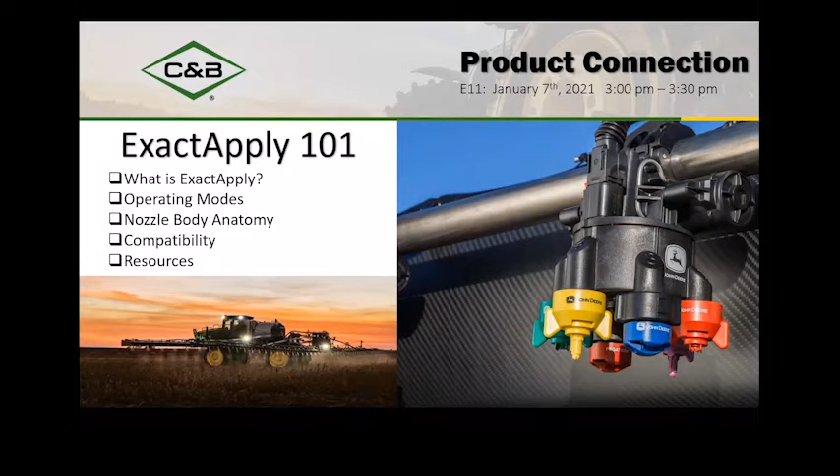Now, with all that being said, not everybody has to be an expert on it. Part of what I want you to leave with also is if you have questions, where can you go for resources or who can you call and those sorts of things. So appreciate you hopping on today. So we'll go ahead and just dive right in.

So first off, when we talk about ExactApply, there's really four key features that we talk about. The main thing being the operation modes would be the best way to describe it. So there's auto select AB, which is basically conventional spraying, letting the sprayer decide which nozzle is the best to use. There's 6 nozzles on an ExactApply nozzle body, and we'll look at that here in a little bit. The sprayer, based on the pressure thresholds and the nozzle types you're using and the speed that you're running, can automatically switch from one nozzle to another or run both at the same time.

Now, this is an industry exclusive thing. Nobody else in the industry is doing this today to the level that John Deere is. Now, Pentair and Hypro, they've got a duo select system, which does something similar, but does not have all the features that Deere is running specifically. And they've been working together on both systems.

But Case, Agco, they're all running essentially a Raven built system today. So for the past several years, if you look at like a Case sprayer that's got Aim Command or Aim Command Flex, that is more than likely built by Raven. Should be the same as their Hawkeye system. So anyway, that's auto select AB.

The other main feature we talk about, and the rest of these are going to be a little more consistent with what other competitors offer in the market, is turn compensation, allowing the nozzles to keep consistent flow across the entire boom when we go through turns. So obviously we've got it on planters with ExactEmerge or MaxEmerge. Sprayers doing the same thing.

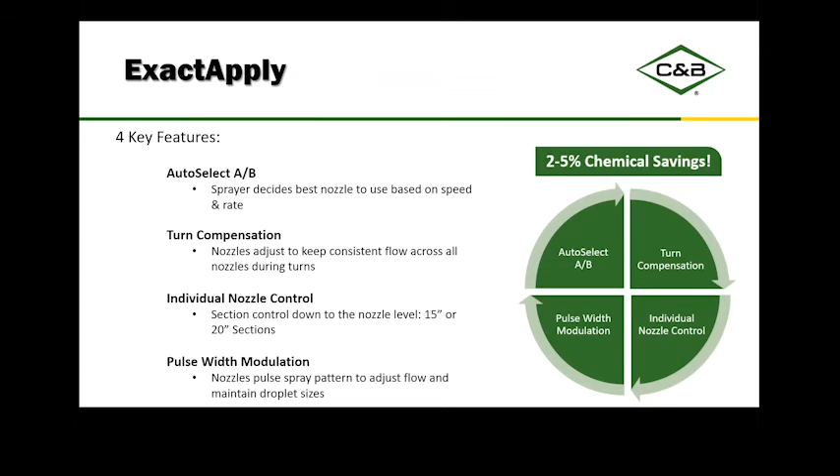So a couple quick animations looking at each one of these examples before we get into the nozzle body anatomy. First off, the auto select AB. Like I mentioned, auto select AB allows the sprayer to select one nozzle versus another. So we'll see it here.

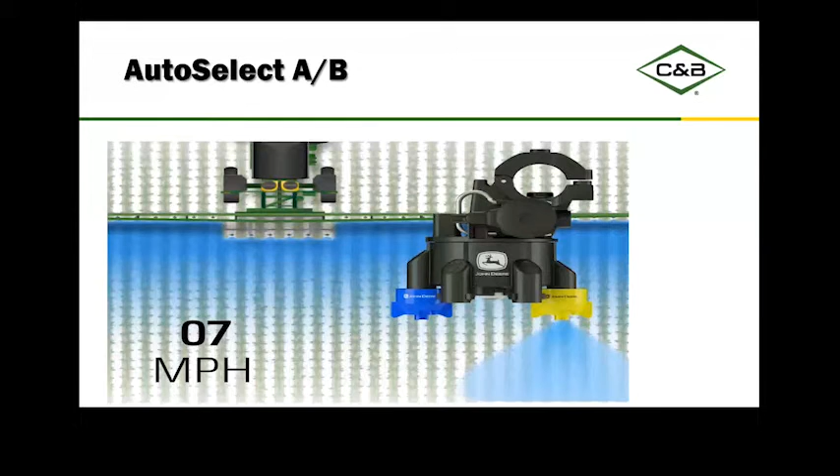We're running the yellow nozzle. We get to 8 miles per hour. The sprayer detected that we're moving faster. Our pressure may have gotten up to 60 psi. Switches to the second one. And here's the industry exclusive bit: we get to a higher flow rate and we can kick both nozzles on at the exact same time.

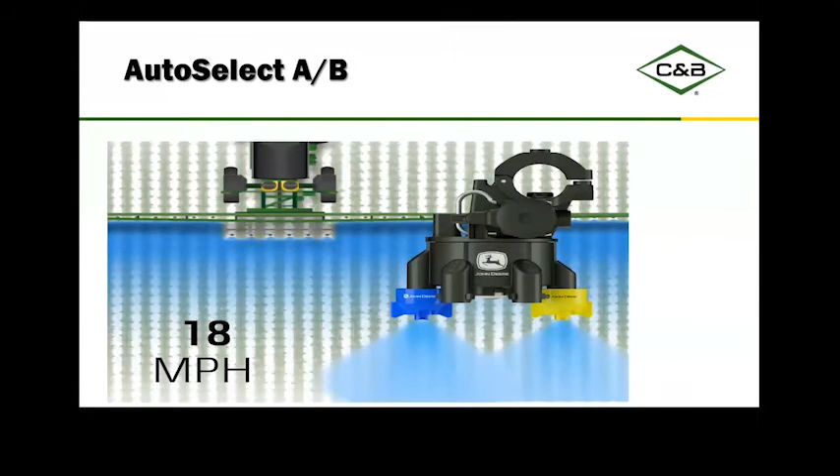Think about your guys applying pre-emerge fertilizers or restricted-use chemicals. For instance, if we've got a label that doesn't let us use a tip we can pulse with, like most air-inducted tips, we're not allowed to pulse them. Running an auto select system allows us to keep our pressure down but still spray conventionally, which is one of the nice things about ExactApply—we can pulse, or shut the pulsing off and run conventional spraying, using it either way.

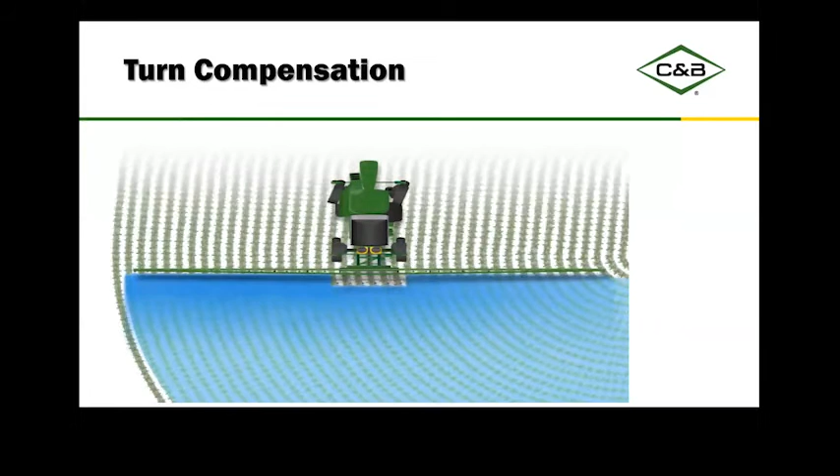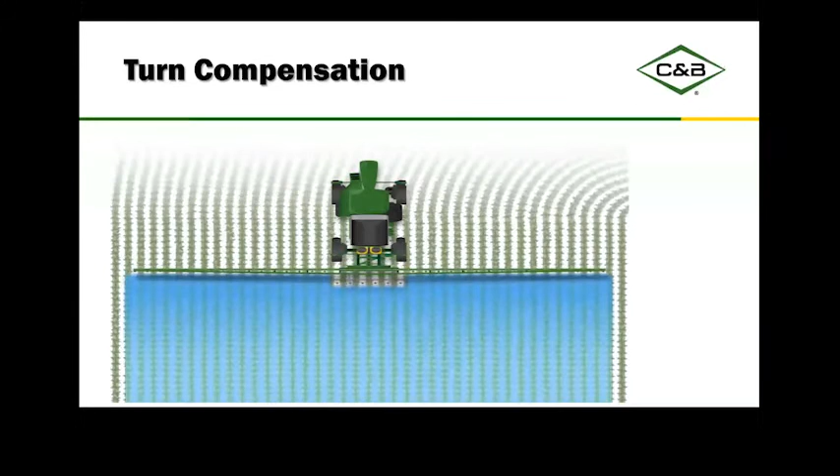The next feature we talked about was turn compensation. Nothing different here, just allowing you to see the animation. As we go through the turn, the inside flow rate decreases, the outside will increase. And couple that—if you take a tighter turn where the nozzle bodies overlap where they've just applied—we can actually shut those nozzles off automatically using section control, which is what we look at here in the next example.

The individual nozzle control—think about a 120-foot boom with 15-inch spacing, that has 96 nozzle bodies on it, so 96 individual sections, which can lead to that 2 to 5% chemical savings. If I do 2 to 3 passes per year, and run a chemical program that's $40,000 to $50,000 a year, that can add up very, very quickly. So individual nozzle control is something that's pretty outstanding, and that benefit just increases with more point rows, more waterways, and things like that.

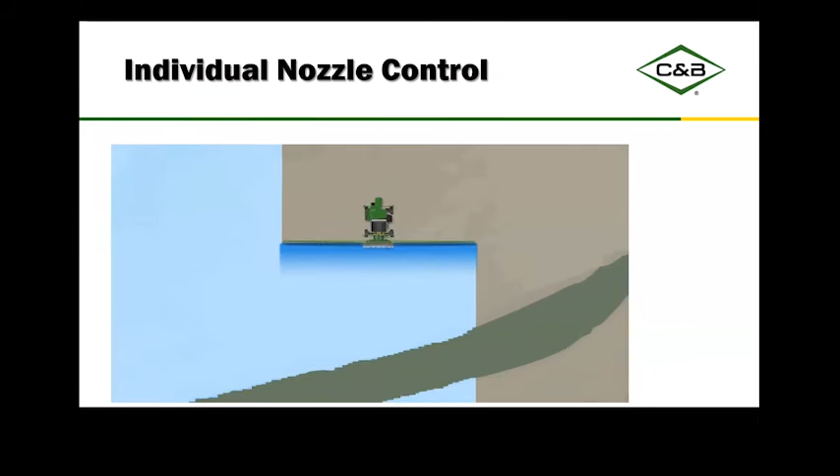Okay, when we talk about the PWM side, this one gets a little more complicated to describe, just because it is fairly new when we talk about spraying out of nozzle bodies. It uses similar technology we've seen in other PWM-type applications, but what we do is have a couple different operating modes, and that tells the nozzle bodies how to react. The modes of operation are combined mode or separated mode.

When we use both of them together, they are opposed from each other, so they don't apply at the same time. That allows us to apply up to 30 times per second, which is the fastest in the industry by about 10 times a second. So a really good advantage we have there.

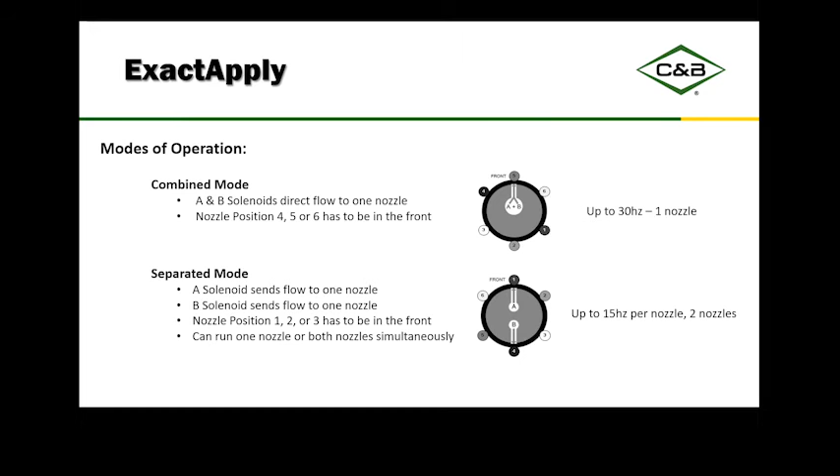One of the questions I've gotten is about pulsing in auto select. If you remember auto select, it's being able to have the sprayer automatically select which nozzle to use, and that's correct — it's only spraying conventionally today that auto select will work. Last I heard, Deere is working on having an auto select option while pulsing, but today our software does not allow it. If they do come with it, it'll be a software update, not a complete machine rework.

Okay, so combined mode. A little more detail here as far as some of the features we can operate. I've talked about a few of these, but again, the A and the B pulse are going to be coming out of one nozzle, which allows us to pulse at 30 hertz. We get turn compensation, individual nozzle control, or section control. They also have a feature called boost.

So boost allows me to put a higher flow rate out selected nozzle bodies if I want. Think about applying a higher rate directly behind the wheels to help penetrate through any dust that might be getting kicked up, or possibly on the outside couple nozzle bodies to put a higher rate in fence lines where, at least at home, we've got ragweed problems. So I might want to make sure I get a little higher dose out there to maximize penetration and coverage.

We also can run pulsing off, meaning it'll be a conventional sprayer at that point. When we spray conventionally, a sprayer that comes from the factory with ExactApply does not have any section valves, so the only way we can shut sections off is through the nozzle body. So if I spray conventionally, the nozzle body acts as my section control valve. I would still have nozzle by nozzle shutoff even when spraying conventionally, which, when we look at our most competitive machines, is not the case without totally switching modes and reconfiguring the system and the monitor.

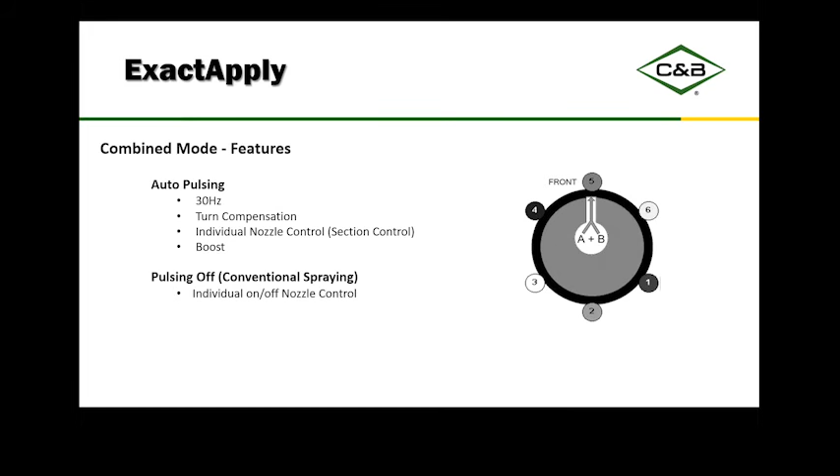Okay, separated mode, just a few more things here. Individual nozzle pulsing, so only one nozzle is pulsing at a time. We can have them, in this case, running A or B, so 15 hertz would be the maximum we could run those at. We do get turn compensation, individual nozzle control or section control. Boost is an option here as well.

And then manual nozzle switching, that's basically the push button switching from the A nozzle to the B nozzle from the armrest, which we'll talk about again in future classes, where the buttons are and so forth. We can get A plus B pulsing, which basically is using the A nozzle and the B nozzle at the same time. So both solenoids are pulsing, but out of separate nozzles, which gives us the 30 hertz pulse total option. So we get that turn compensation, boost, and individual nozzle control, just like the other modes.

Then also when we are in separated mode, we can run in auto select, which again would be conventional spraying at this point, no ExactApply, or no pulsing I should say. That does give us individual nozzle on/off, automatic nozzle switching, and we can, when we're in auto select, manually select which nozzle we want to use as well. And there is a little bit of math and finesse to selecting nozzles with the auto select. We'll get into that in some future classes as it gets a little more advanced, just depending on what a customer might be applying with.

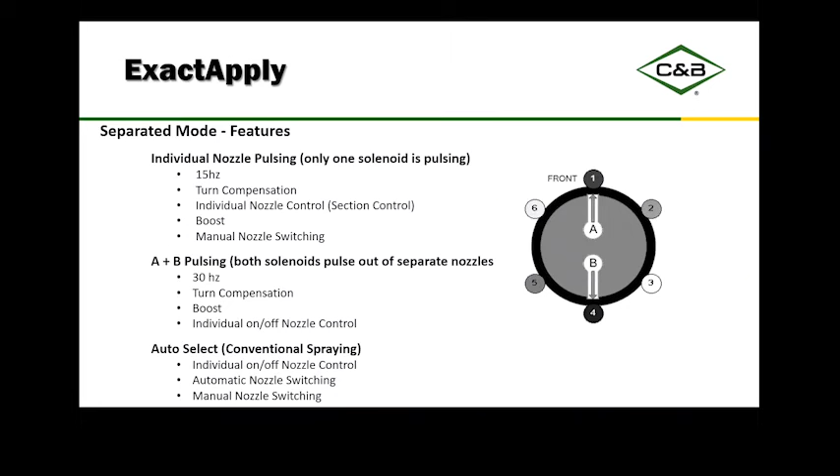All right, let's back up and take a look at some nozzle body anatomy. There are a couple things here to make a note of. First off, the way this nozzle is positioned is how it would be if the sprayer was traveling forward. So nozzle position 4 is in the back, and 1 would be in the front position right now.

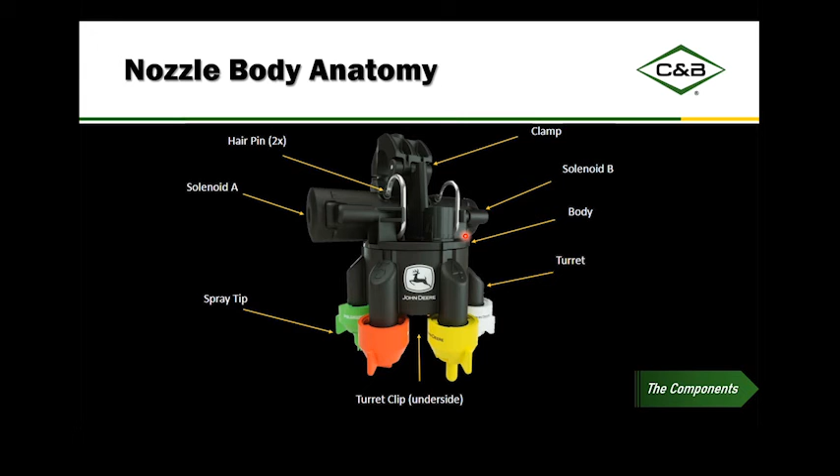Our A solenoid will always be on the left-hand side, and the B solenoid will always be on the right-hand side. If the nozzle body is off of the machine and you're bench programming it, or a customer dug them in the dirt and you need to do some repairs, the way to tell is the electrical connector comes in and is always on the back side. So with the back side pointed towards you, A will be on the left and B on the right. There are hair clips here, and I'll actually break a nozzle body apart in a minute to show you the different components. If you've got questions, feel free to unmute and ask, or type them in the chat.

So when we turn the nozzle upside down here, you'll see there are positions for 6 individual nozzles. You don't have to have all 6 on when you're out running. The system just essentially has to have 1 on in order to spray, as long as you're only applying out of that 1 nozzle port.

We have positions for 6, but a lot of our customers don't need 6 at the same time. So if I only have 2, 3, maybe 4 nozzles that I'm using, we have the option of putting caps on here. They run for about $1 a piece, so we can cap the additional ones as well. Factory machines in 2021 are supposed to be coming with caps on already. I have not verified that, so if anybody knows that for a fact, let me know. But last I heard, they were supposed to be shipping with the caps on.

The bottom side has an integrated LED light as well, which allows for great nighttime spray conditions. Even during the day, that light can be on, and it shows you, as you're sitting in the cab, a bit of the spray pattern out of each individual nozzle. It makes it easier to see if there's any blockage issues, and when you're pulsing them, having something change while you're sitting in the sprayer helps you verify that something's working correctly, which is what's really nice about having that LED light underneath.

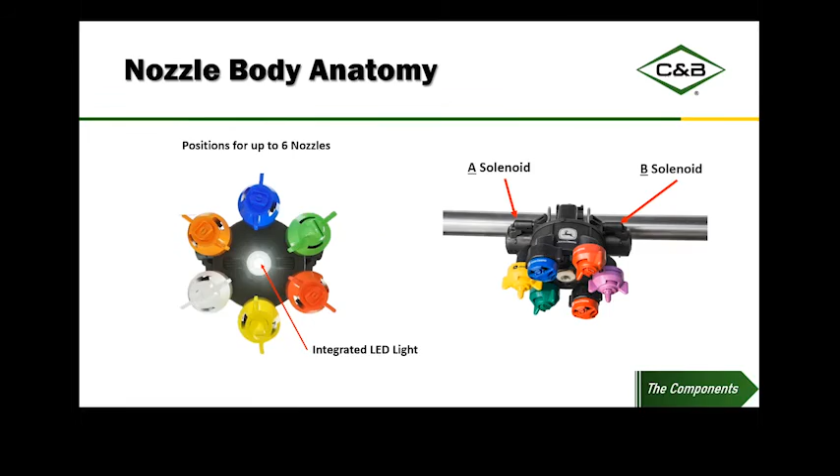Okay, I'm going to stop presenting here and show a camera. If you guys can't see those nozzle bodies, let me know. But I want to give you a real quick look here at breaking down a nozzle body.

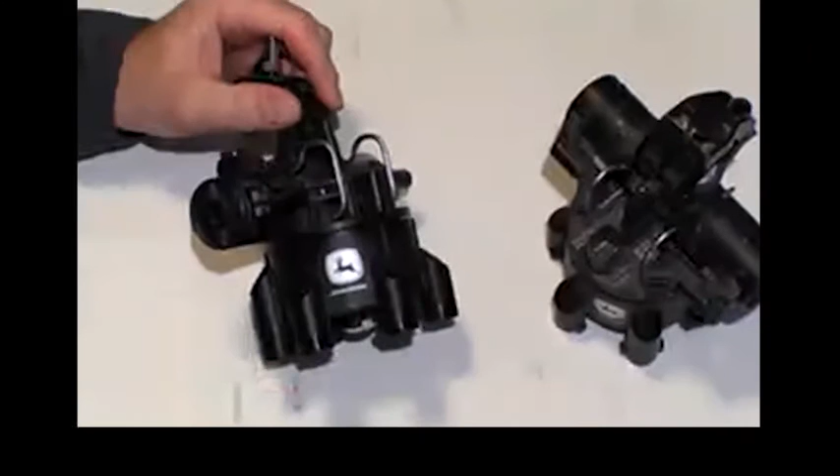Okay, so on my nozzle body, if we look at the different pieces to break it down, first off we've got two hair clips, the A side and the B side. I'm going to go ahead and remove one side, remove that hair clip, and pull off the magnet. So this is what's doing the pushing, pulling part. It's an electromagnet, and there are no other moving components in there. It's essentially where that stem goes, and then the electrical connector.

The electrical connector part is important to note - the factory does send them with dielectric grease. When we're doing maintenance on them, especially out in the field, we want to make sure we recoat and have a good application so we don't let any corrosion get to these pins, because this is not serviceable.

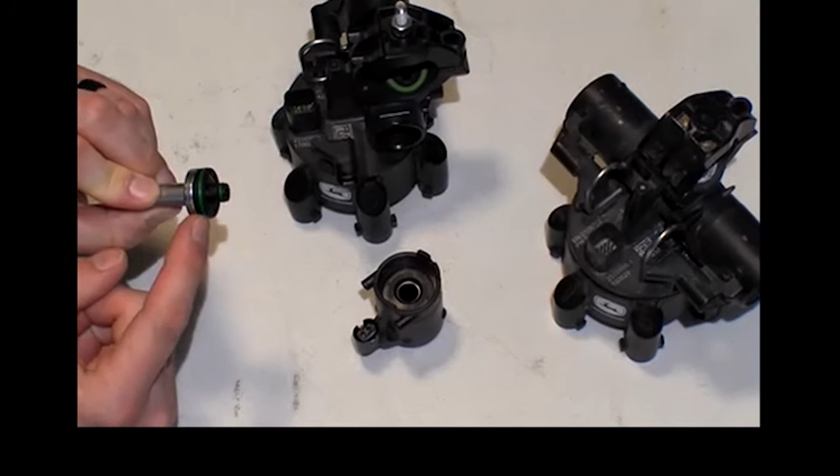Now this stem is threaded, so this black cap can come off. You'll notice there's an O-ring on the tip, an O-ring on the outside leading edge, and then an O-ring on the back side as well. So when we talk about wear pieces, O-rings are definitely on the list of things that can get worn. And if I unscrew this black part, it comes off along with the interior components.

There's one more green O-ring on the inside here that we want to make sure of. This one can, especially if I've been in there and worked on it before, come loose and get pinched or torn a little bit. This one can cause leaking, at least in my experience, a little more than the rest. So for the meantime, we'll go ahead and set that aside.

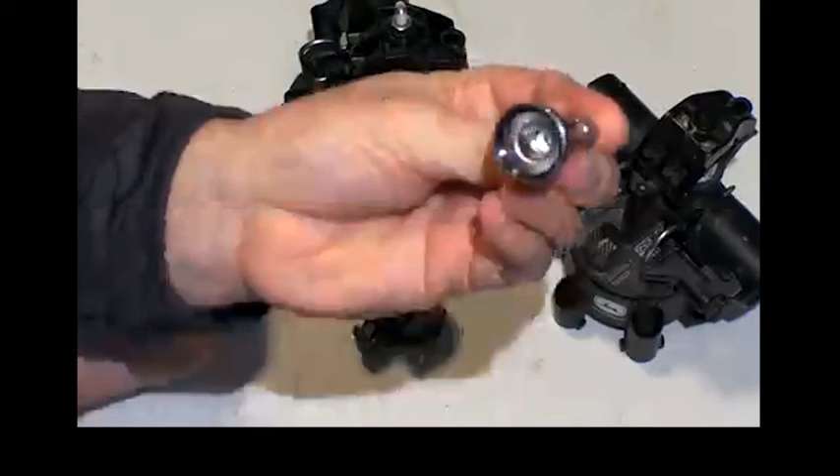And the rest is going to be inside of this stem. So be really careful, because there are parts that will fall out in here. If I tip that upside down, you're going to see there's just a hollow compartment. If we've got water with small pieces of gravel, grime, or sand in it, that can cause scoring on the inside of this stem, which can cause issues with our poppet or our shuttle in here. So it's really good when you pull this apart to take a look and see if you see any scoring or anything like that.

Okay, I'm going to set that aside for now and we'll look at the last piece. So here's the poppet inside. This goes back and forth and sits on a small metal spring. Again, obviously with that moving, they are considered wear parts.

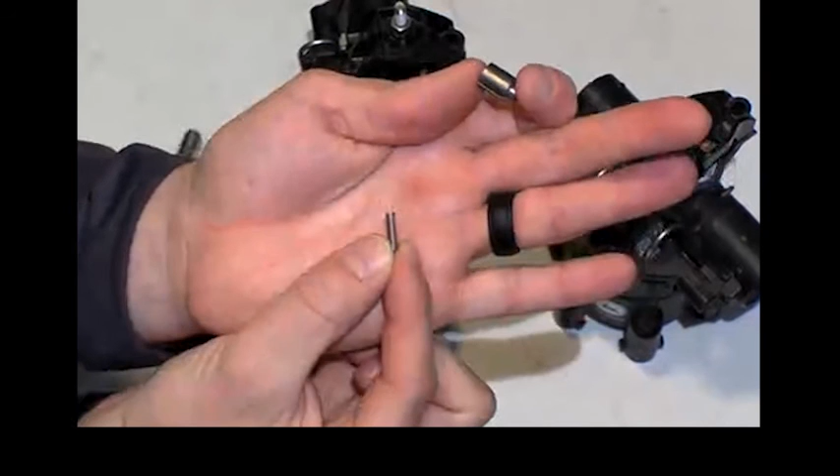Wear life is hard to say in hours, since sprayers get used different amounts in different operations. So far we've not had to do full replacements unless a customer had really bad water or didn't do proper flushing procedures frequently enough. Another thing you can look at is any scoring on this if it's a used machine, and on the very top, see if there's been any flaking on the cap. That's usually a good indication of whether the machine was properly cared for and winterized.

To reassemble, I'm just going to take my spring and push, set that in there—it just rests in there nicely. Then I take my stem and marry the two back up together. So just to give an illustration, when that electromagnet operates, this little shuttle in here is just going to move in and out. That's what's causing our pulsing—it's doing that up to 15 times per second, and that is what causes the pulsing on our nozzle bodies.

Again, to reassemble, make sure all of your O-rings are nice and seated. They do have a tendency to float out just a little bit, especially if they're damp. This nozzle body's dry, so I don't have that issue.

A lot of times when you take this cap off, that inside O-ring will be sitting inside the stem, so just be aware of that.

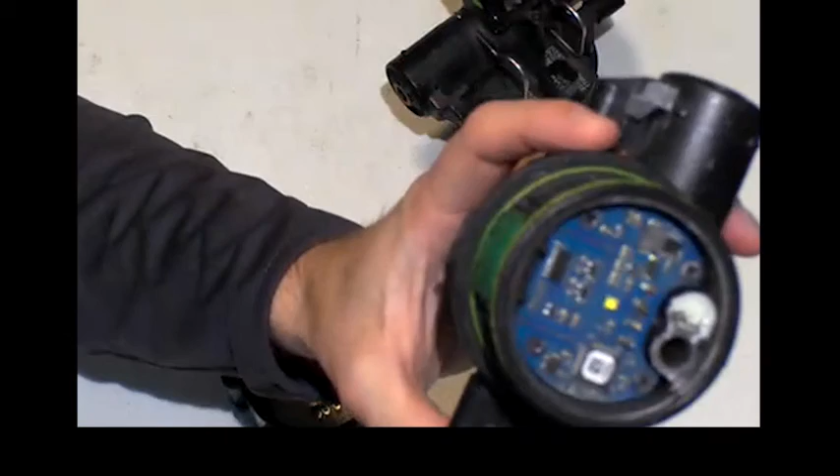Hey, so I've got one here that's just a good example of if you don't properly winterize, it's not supposed to have the circuit board showing. That actually ended up staying inside of this part. What happened was the sprayer didn't get winterized properly all the way out to the booms, or all the way out to the ends of the boom tips. So moisture got inside of here, and it just expanded and cracked the cap off. Once this cap comes off, it is not fixable anymore. It just gives you a little better look there, so you can see what's inside. But there's nothing we can do about that to salvage it.

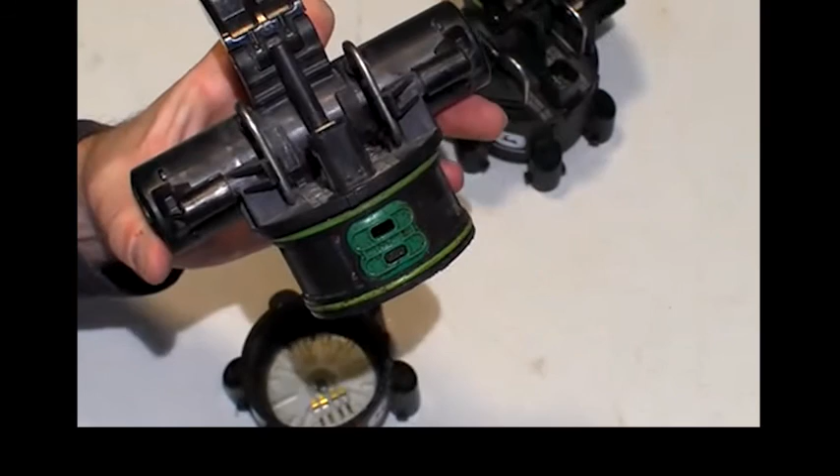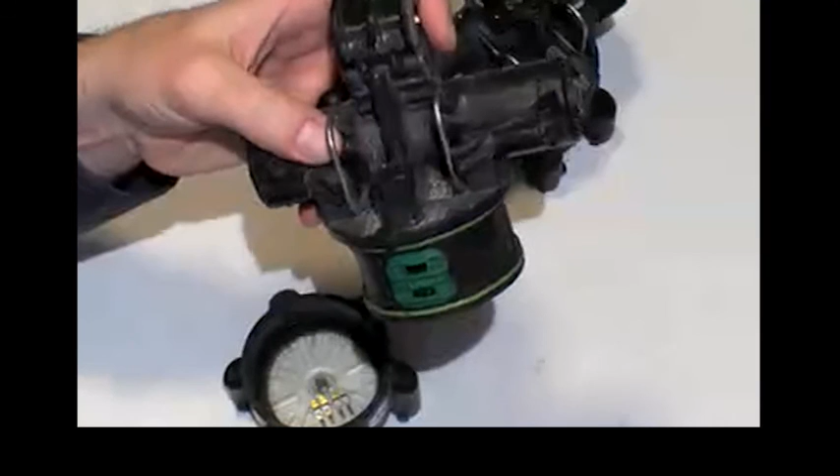Okay, and when we talk about winterizing, it's important to note that because we've got the A and the B nozzle ports, we've got basically fluid from where it enters, sitting inside of the solenoid, out to essentially right here if it doesn't drain out. So when we have the shops go through and do the winterizing procedures, it's very important to run both the A and the B nozzle, even if there's no nozzle on it, just to make sure we've got antifreeze or winterizer fluid coming out, because if I only do one side, I could still have an issue.

So on ExactApply sprayers, it's really important to properly winterize, and spending a little more money on winterizer fluid is really worthwhile from my experience. This nozzle body came off of one that did not get winterized at one of our stores. We ended up paying for 17 nozzle bodies to repair it for a customer, because it was basically our mistake. So just be aware of that, it can creep up and cause issues.

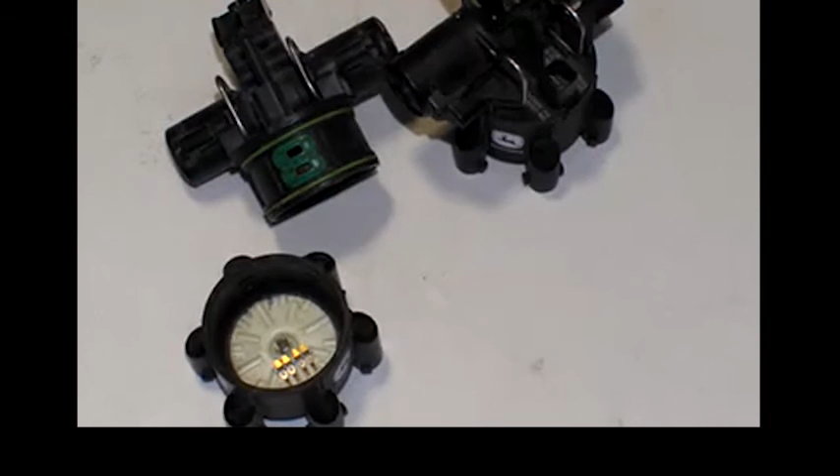I am working on a winterizing video, but John Deere also has a good one out on YouTube we can look at. With all these O-rings in here, there's two large ones that go with that, along with O-rings inside of the individual pulsar portions or the solenoids. There's $29.51 at retail worth of O-rings in each individual nozzle body. So if we look at needing to rebuild them, that's what it would take in parts. There's obviously a labor side to be considered too, but I just want to make sure you're all aware of that.

Okay, a couple last things here before we wrap up and let you go. So back on the PowerPoint slides here again.

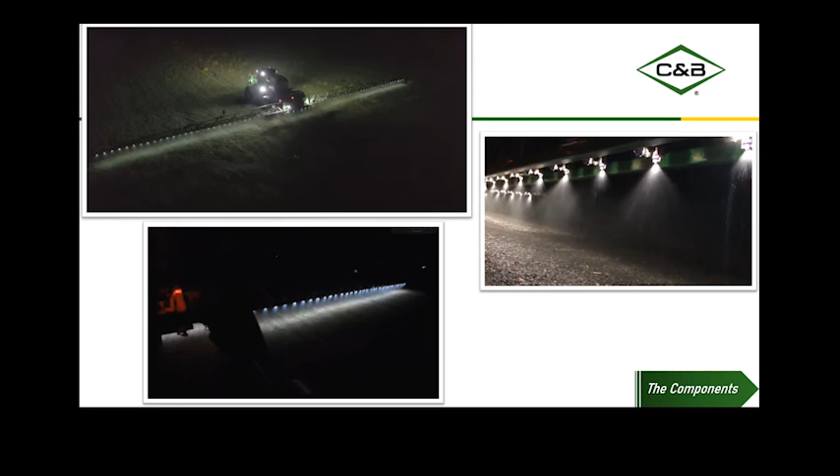Now, we talk about compatibility. We can get this from the factory on booms 90 up to 132 foot, steel and carbon fiber, available across the 4 series sprayer lineup: 4023, 4030, 4038, 4044, 4045, and the 4060.

Not currently any kits available for Hagie sprayers, but keep your eyes peeled. I anticipate we'll be seeing some changes there in the next year or so. We do have an LPB machine coming from Hagie for model year 22 that may or may not have that kit on it, but they're redesigning a few things to have that ability in the near future. I'm not trying to hold back any information, I legitimately don't know if they'll have it on that LPB, but it is planned that new form will have that option. We get that machine in March, and I'll communicate out more information, showing some pictures of what we can expect down the road.

Also available in 15 or 20-inch boom spacing, 2630 or Gen 4 monitor. Not compatible on the 30 series sprayers, so the Gen 4 monitors would be in like an R4038 model year 14 or 15 for instance. Receivers, SF3000 or SF6000, are both compatible.

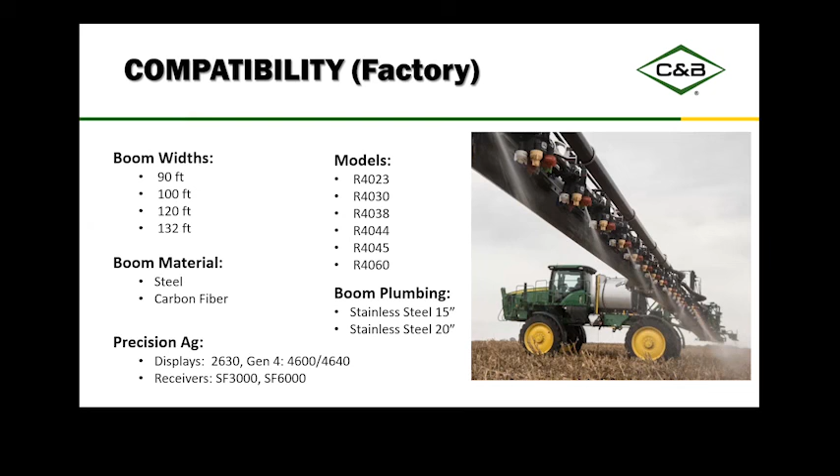We do have performance upgrade kits available. So if we've got a machine on the ground, a 4 series sprayer that's 2014 or newer, we do have kits available to retrofit or do a performance upgrade to add ExactApply onto them. Steel and carbon fiber booms, 90 up through 132-foot booms as well. One caveat is you have to have stainless steel plumbing. Just kind of recognize that.

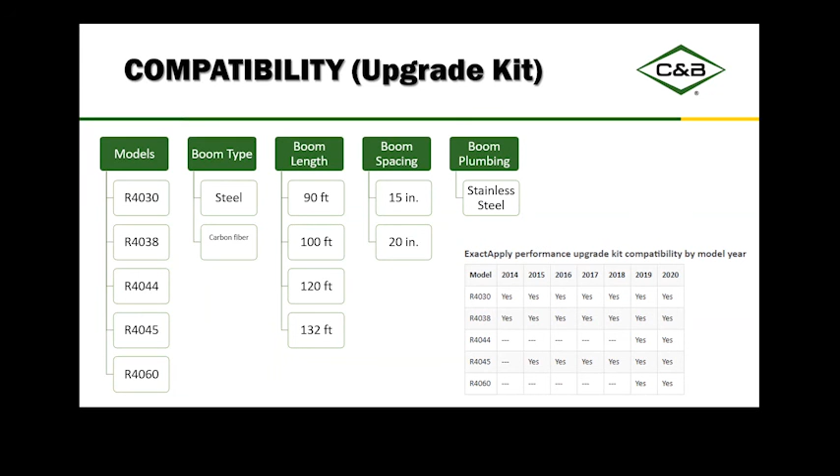I think there's only one 4023 on our territory that I'm aware of. A 4023 sprayer has a different form factor. You can get ExactApply from the factory, but there's not a retrofit kit if you end up dealing with anybody that happens to have that machine.

Okay, a couple resources. I mentioned this as I was talking, that they updated some cartridge things here in model year 2020.

The assembly numbers for the nozzle body have changed. Now, this is important because the software version that comes on sprayers, there's a software bundle loaded into each one of these nozzle bodies, and they all have to match each other.

And we can program them. If I have a tech plug in a Service Advisor, I can program the nozzle bodies, but I have to program every single one, and it can take a couple hours. We do have bench upgrade kits that are available. I know some of our stores have recently been buying those to have them.

But you can plug Service Advisor in and update up to 3 nozzle bodies at a time. So again, it's just important to know what version of software they came with. So if you've got AKK 27552 nozzle bodies on your parts shelves, they have older software in them. If the sprayer is newer than that, they will have to be updated before you can do any swapping without having software mismatch issues. So just be aware of that.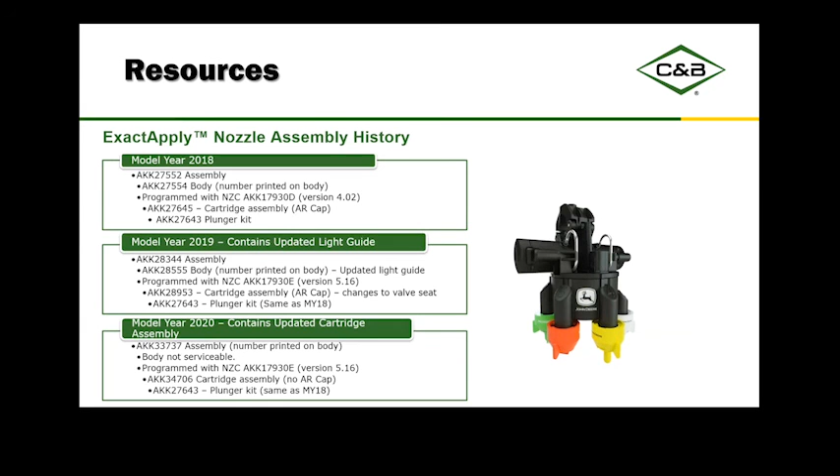And then the other updates we talked about with that updated laser weld assembly and the non-serviceable kind of bottom part that we talked about there. A couple of last resources. Deere does have walk-around guides. There is demo material available for ExactApply.

Nozzle selection is absolutely crucial when we have ExactApply sprayers. So I want to make sure I don't walk past that part. We'll cover that in a future session. But selecting nozzles for these sprayers is really important because we have a lot of questions we need to ask our customers in terms of how fast are they operating, what types of chemicals are they applying, because some are restricted use. Then obviously the regular questions we ask with nozzles, rates and speeds that they kind of typically run.

And then when we get into the auto select options, there are even more configurations we need to consider so that the nozzle bodies aren't trying to make too much of a jump in between switching, and then also to make sure the two nozzles are compatible with each other.

So last thing I want to mention, just kind of reiterating, the nozzle selection is key. If you have a customer that has ExactApply and they don't have nozzles yet, we should start that conversation soon, just to make sure we have time to get them on and we can put them on at the shop during PDI.

So if you have questions about nozzle selection or what to put on, feel free to reach out to me. There are a couple others in the organization that are confident with it as well. So if you got a guy in your store, by all means, talk to them.